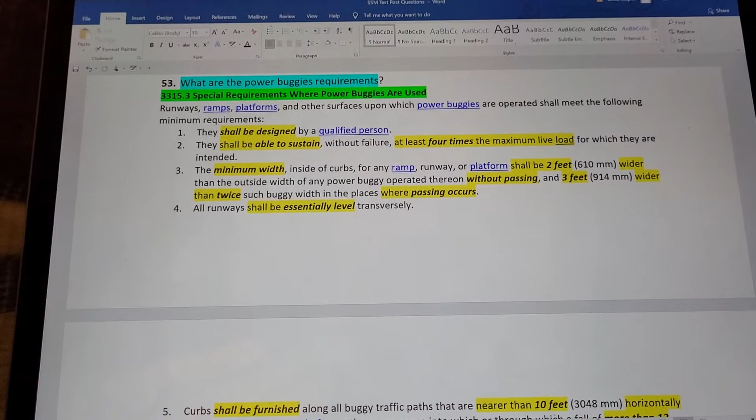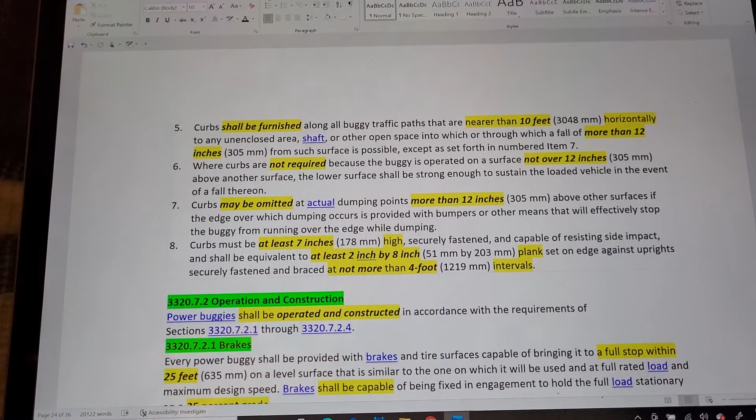Number 4, all runways shall be essentially level transversely. Number 5, curbs shall be furnished along all buggy traffic paths that are nearer than 10 feet horizontally to any unenclosed area, shaft, or other open space into which or through which a fall of more than 12 inches from such surface is possible, except as set forth in numbered item 7.

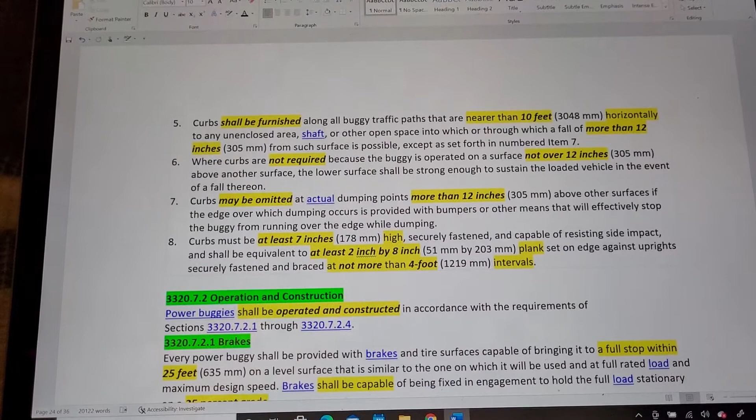Number 6. Where curbs are not required because the buggy is operated on a surface not over 12 inches above another surface, the lower surface shall be strong enough to sustain the loaded vehicle in the event of a fall thereon.

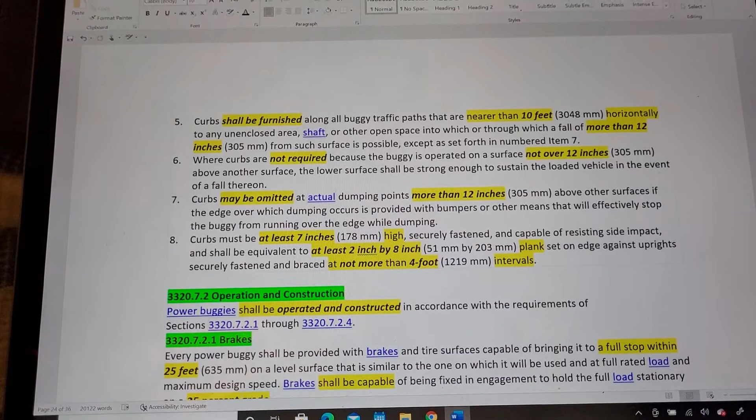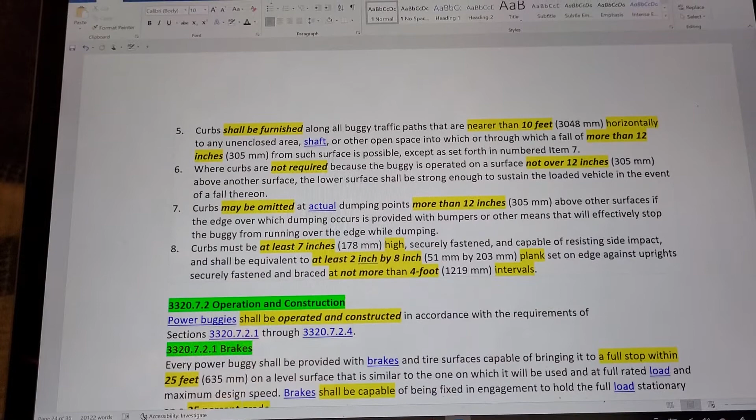Number 7. Curbs may be omitted at actual dumping points more than 12 inches above other surfaces if the edge over which dumping occurs is provided with bumpers or other means that will effectively stop the buggy from running over the edge while dumping.

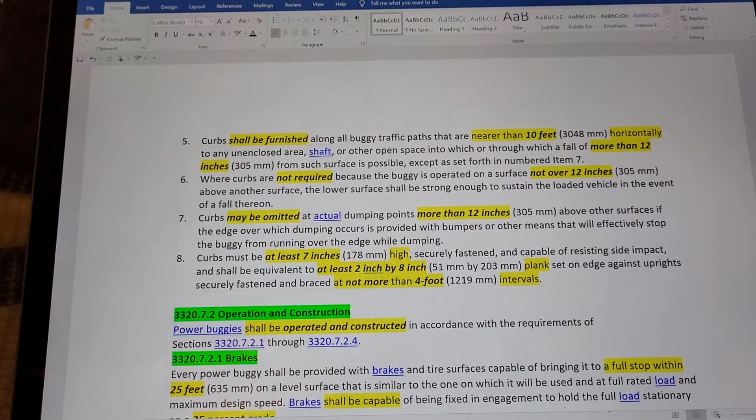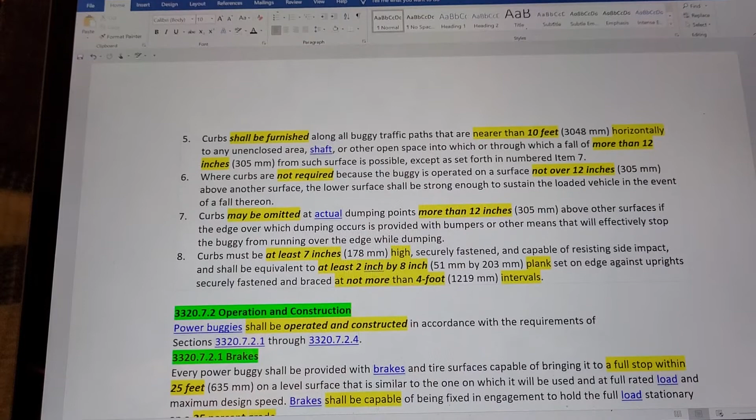Number 8. Curbs must be at least 7 inches high, securely fastened, and capable of resisting side impact, and shall be equivalent to at least 2-inch by 8-inch plank set on edge against uprights, securely fastened and braced at not more than 4-foot intervals. Now, if we move to...

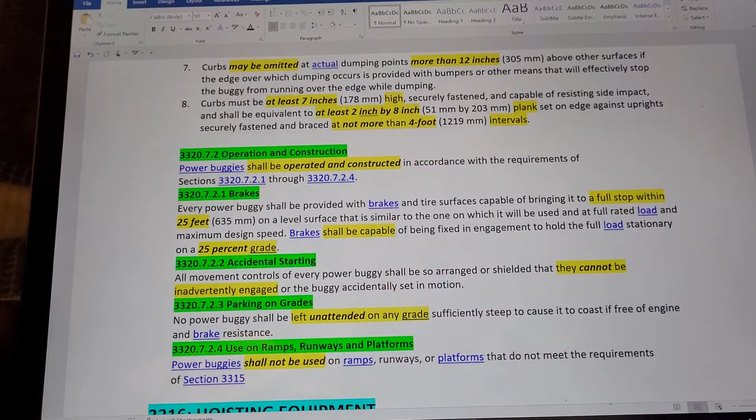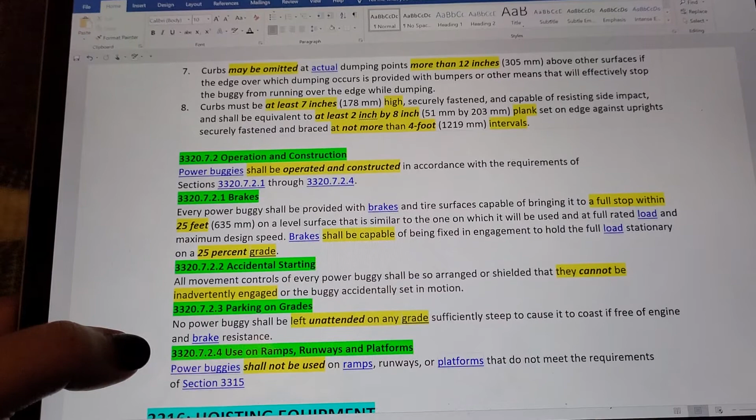Look at 3320.7.2.1, Brakes. Every power buggy shall be provided with brakes and tire surfaces capable of bringing it to a full stop within 25 feet on a surface level similar to the one on which it will be used, at a full rated load and maximum design speed. Brakes shall be capable of being fixed in engagement to hold the full load stationary on a 25% grade.

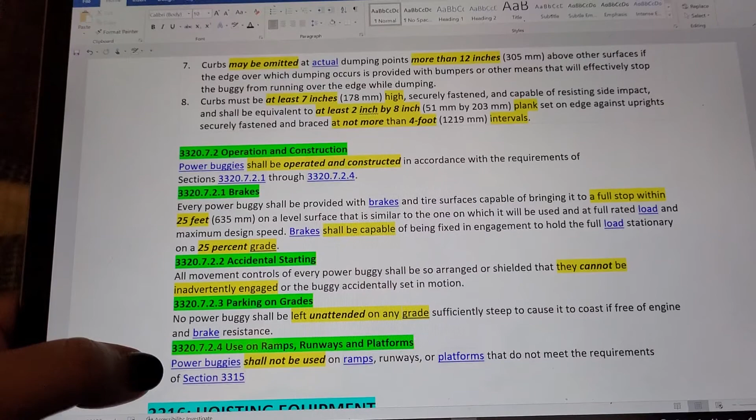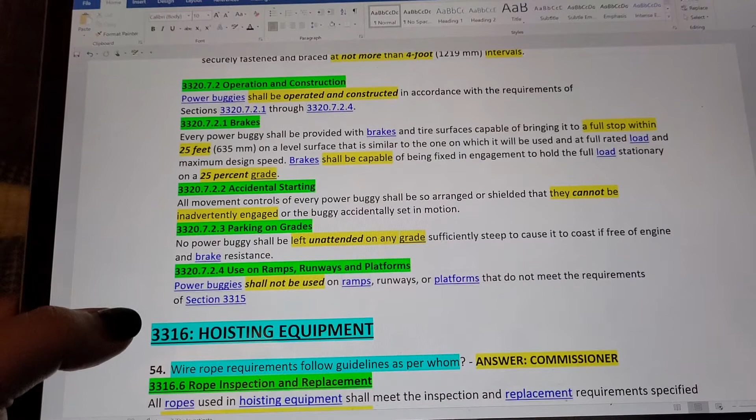Accidental starting. 3320.7.2.2. All movement controls of every power buggy shall be arranged or shielded so that they cannot be inadvertently engaged or the buggy accidentally set in motion.

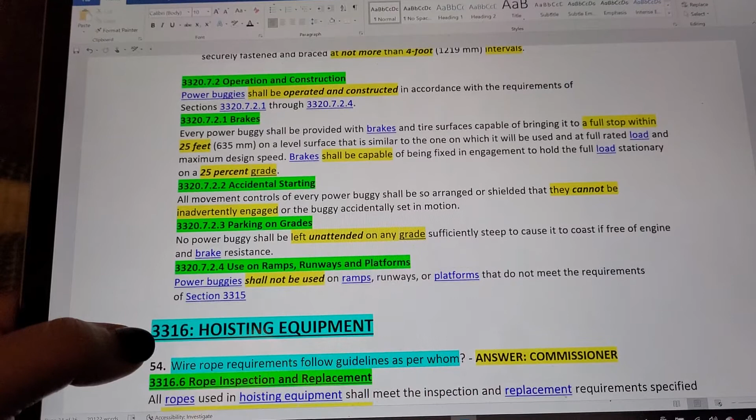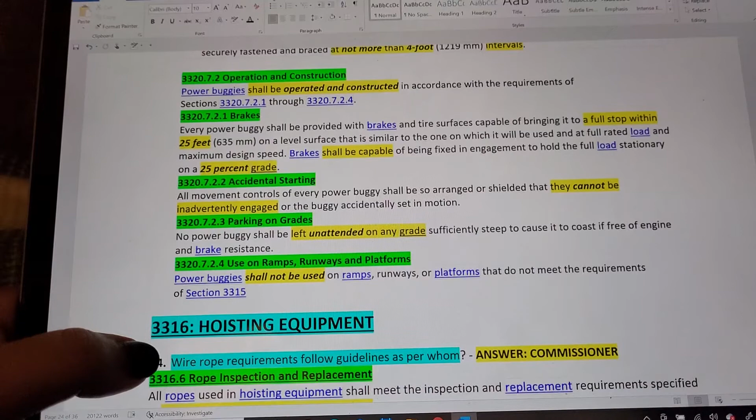3320.7.2.3, Parking on grades. No power buggy shall be left unattended on any grade sufficiently steep to cause it to coast if free of engine and brake resistance.

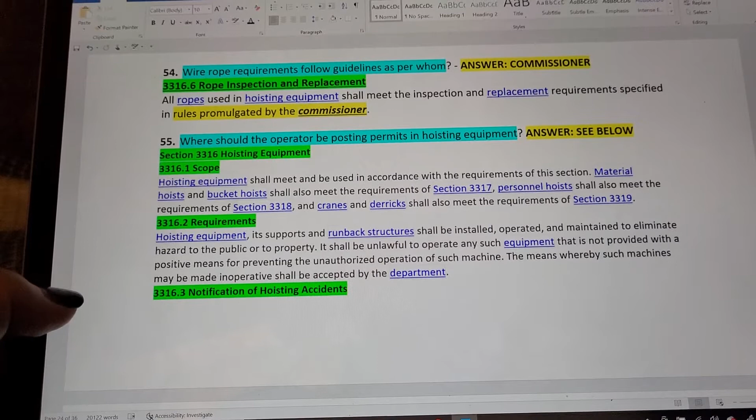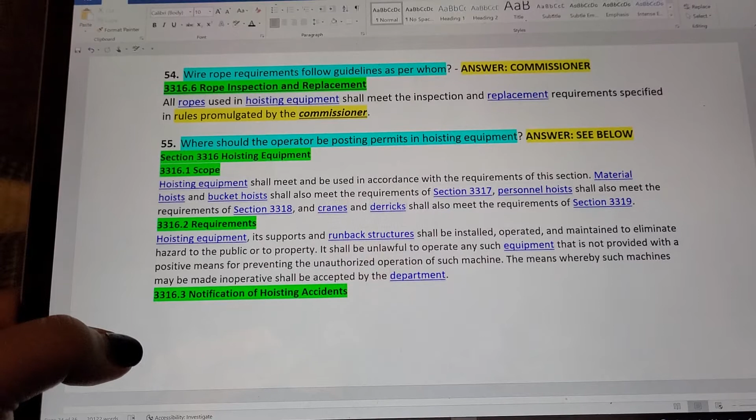Skip up to question 54. Wire rope requirements follow guidelines as per whom? Look at 3316.6, Rope inspection and replacement. All ropes used in hoisting equipment shall meet the inspection and replacement requirements specified in rules promulgated by the commissioner. So therefore, the commissioner is the answer.

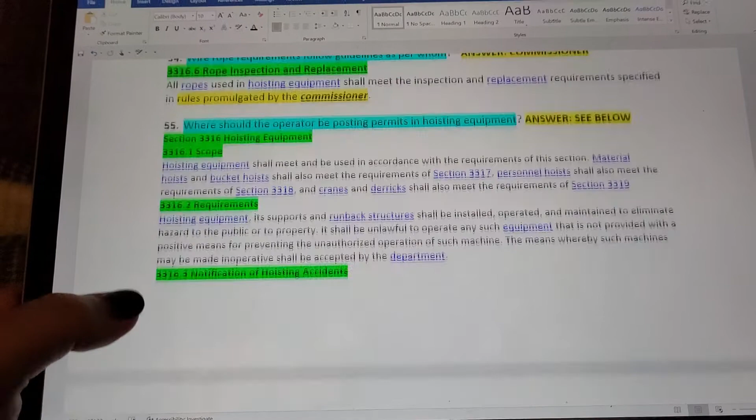Question 55. Where should the operator be posting permits in hoisting equipment? Now, if you scroll down to 3316.4.2, Posting of permits: permits or duplicates of the permits shall be posted in a conspicuous location in the car or on the equipment.

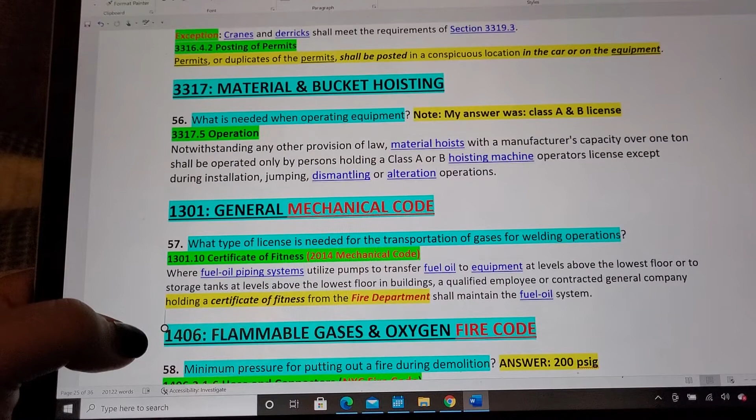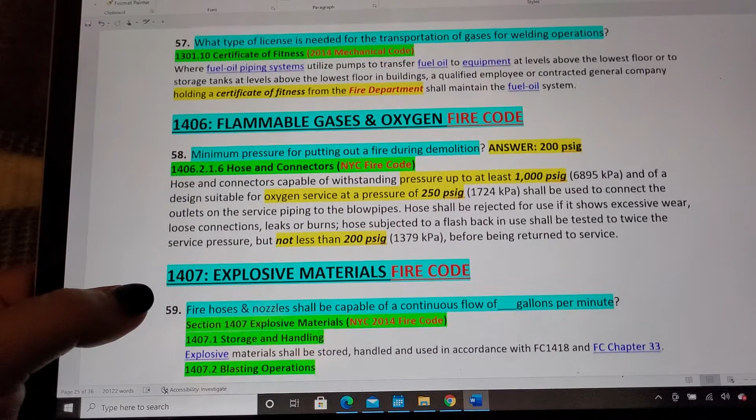Question 56. What is needed when operating equipment? Notwithstanding any other provision of law, material hoists with a manufacturer's capacity of over 1 ton shall be operated only by persons holding a Class A or Class B hoisting machine operator's license, except during installation, jumping, dismantling, or alteration operations.

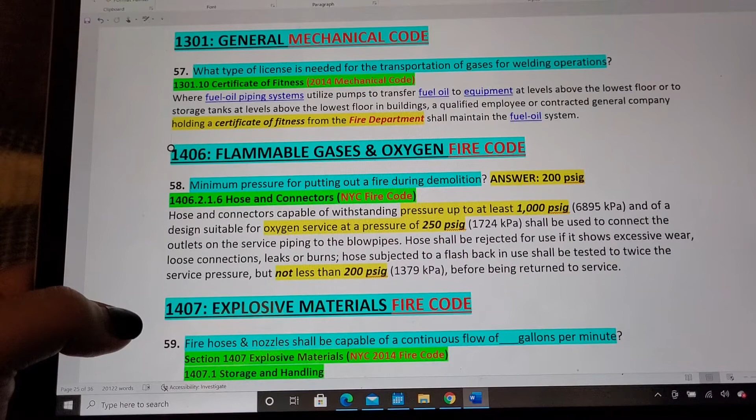Question 57. What type of license is needed for the transportation of gases for welding operations? This is under New York City 2014 Mechanical Code, 1301.10, Certificate of Fitness. Where fuel oil piping systems utilize pumps to transfer fuel oil to equipment at levels above the lowest floor, or to storage tanks at a level above the lowest floor in buildings, a qualified employee or contracted general company holding a certificate of fitness from the fire department shall maintain the fuel oil system.

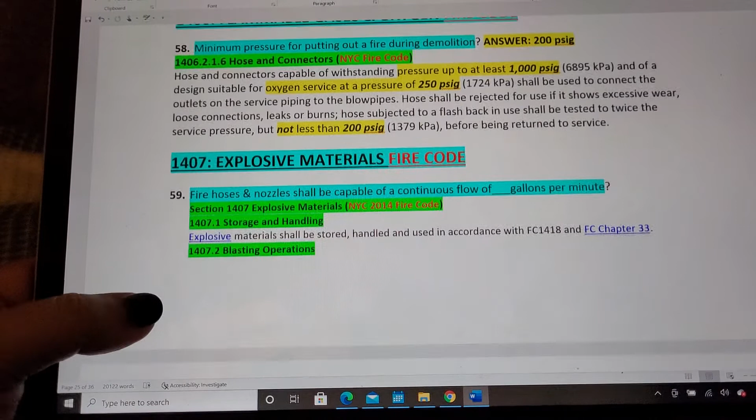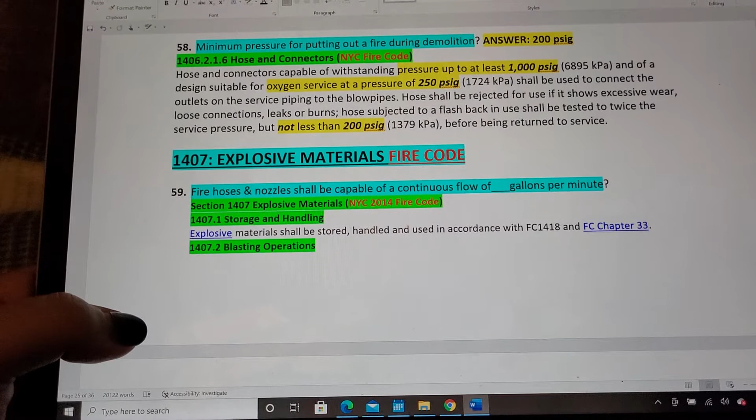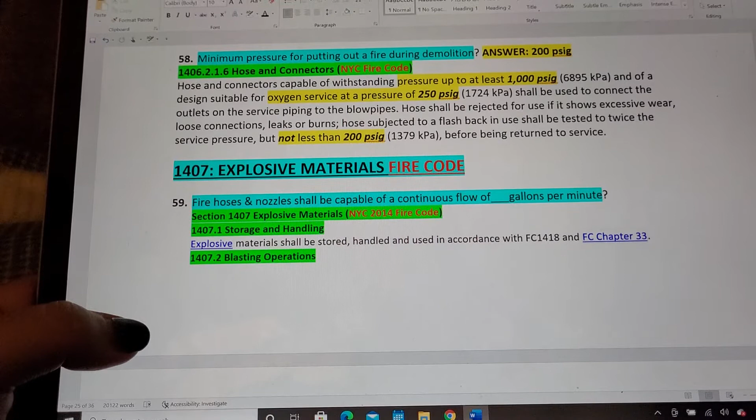Question 58. Minimum pressure for putting out a fire during demolition. According to New York City Fire Code 1406.2.1.6, hose and connectors capable of withstanding pressure up to at least 1,000 psig and of design suitable for oxygen service at a pressure of 250 psig shall be used to connect the outlets on the service piping to the blowpipes.

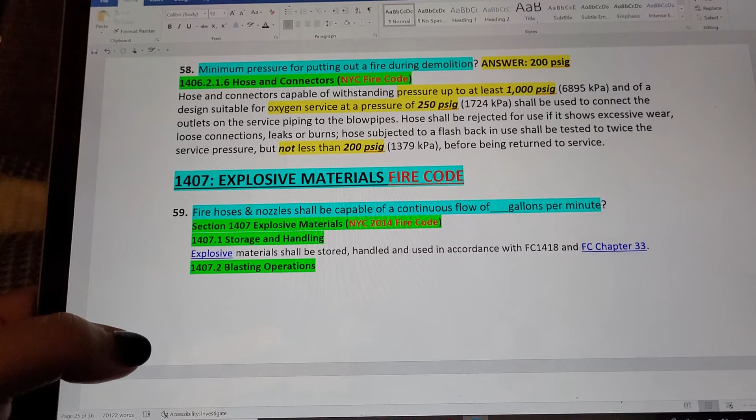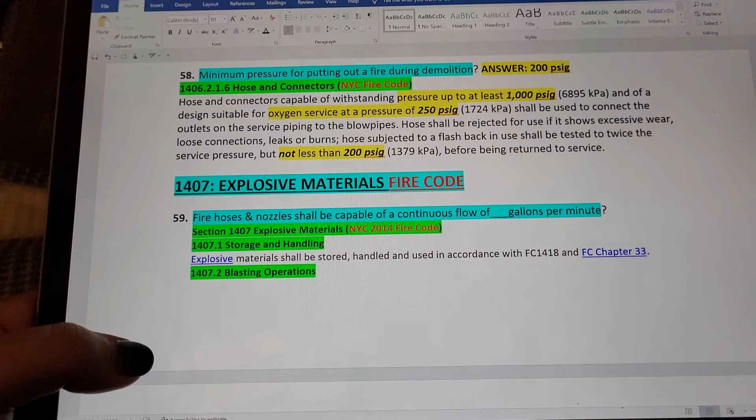Hose shall be rejected for use if it shows excessive wear, loose connections, leaks, or burns. Hose subjected to a flashback in use shall be tested to twice the service pressure, but not less than 200 psig, before being returned to service.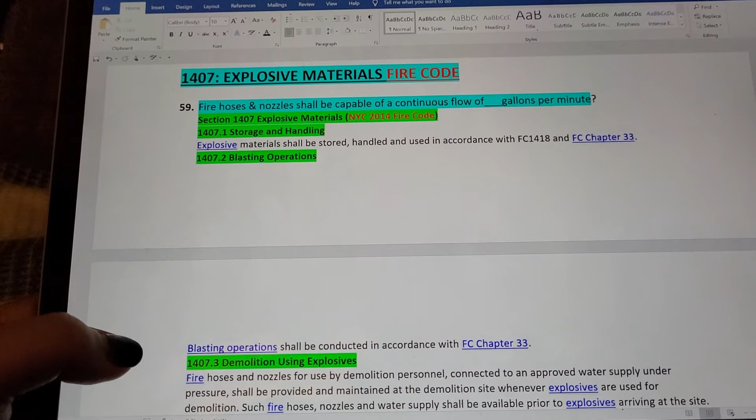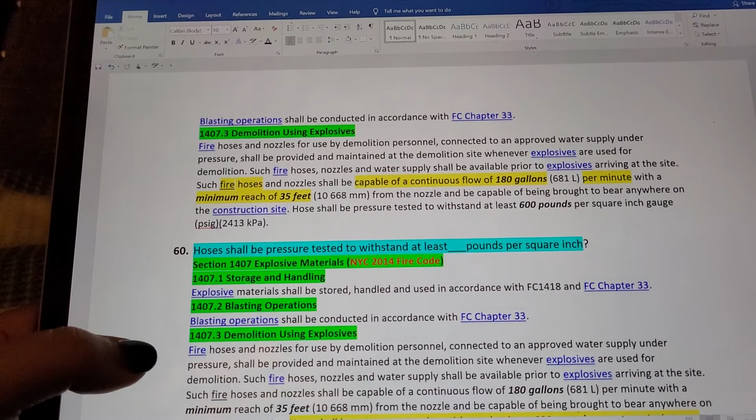Question 59. Fire hoses and nozzles shall be capable of a continuous flow of blank gallons per minute. Going to New York City 2014 Fire Code, Section 1407.1, Storage and handling - not really. We're moving on to 1407.3, Demolition using explosives. Such fire hoses and nozzles shall be capable of a continuous flow of 180 gallons per minute with a minimum reach of 35 feet.

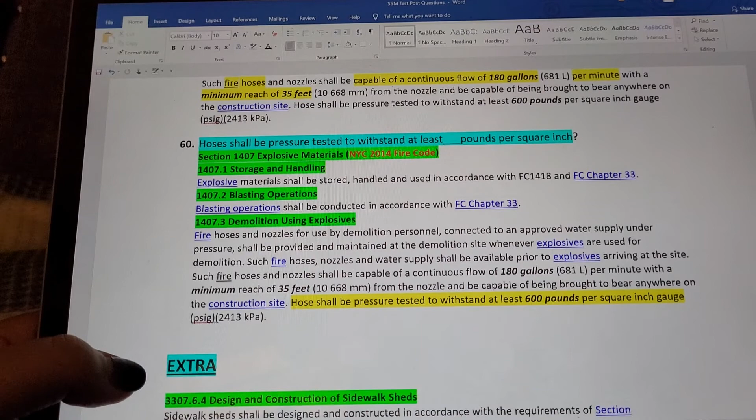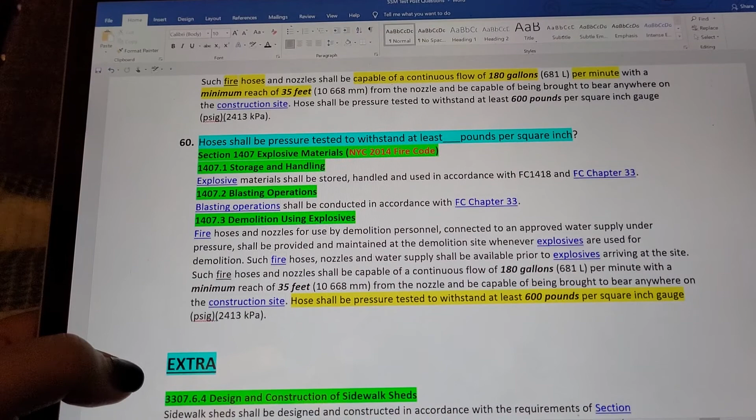And my last question for now is question 60. Hoses shall be pressure tested to withstand at least blank pounds per square inch. Going into the same section, 1407.3, Demolition using explosives: hose shall be pressure tested to withstand at least 600 pounds per square inch gauge (psig).